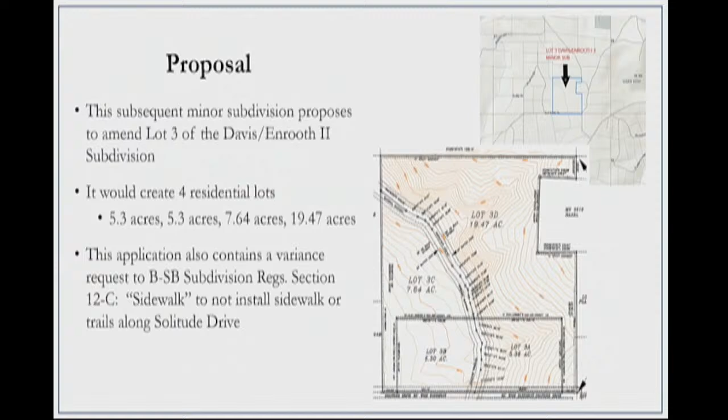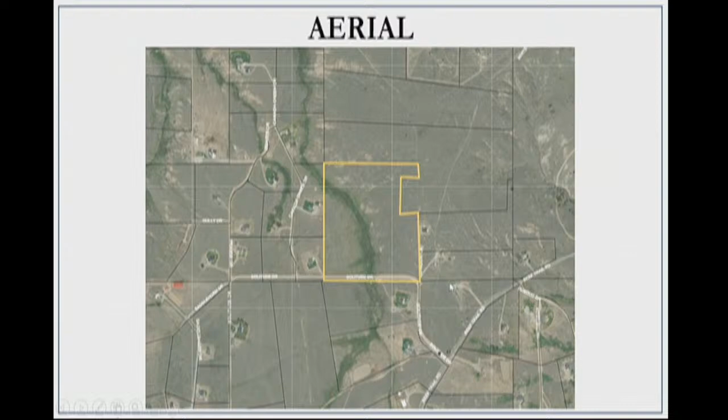Here's an aerial of the location. You can see Beef Trail Road here. This is Solitude Drive, and it's right on that 90-degree corner on Solitude Drive. The zoning is R1S single-family suburban zone.

Those services are not available. Stormwater, sanitary sewer, and wells need to be approved and permitted prior to filing the plat, and the applicant is working on that as we speak.

All access to these lots is along Solitude Drive, which connects to Beef Trail Road. Each of these roads would see increased traffic proportionally for 4 new families. There could be 4 single-family homes on this subdivision. One thing to note is the fire suppression requirements.

It's Appendix A in the subdivision regulations. It gives the applicants a choice to meet those requirements: either installing an underground tank or requiring fire suppression systems in the houses. They've chosen in-house fire sprinkler systems. So when, to the extent that this is approved at the building permit portion, it needs to be shown that those wells can sustain the fire sprinklers.

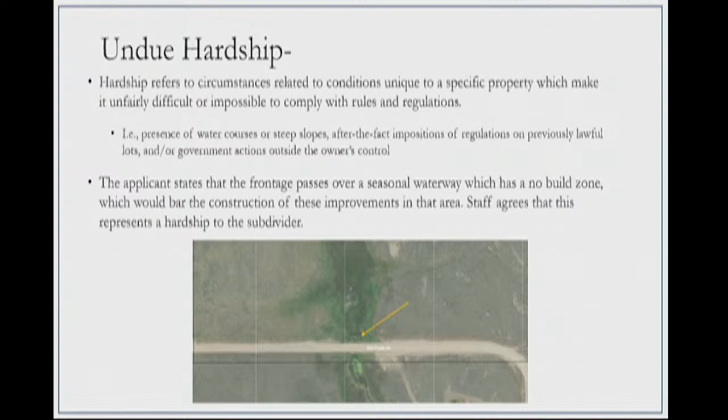Such as water courses, steep slopes after the fact, impositions of regulations on previously lawful lots, or government actions outside the owner's control. The applicant states that the frontage passes over a seasonal waterway, which has a no-build zone that would bar construction of these improvements. Staff would agree for a large section of this, and that can be constituted as a hardship.

As far as being contrary to the public interest, Section 12C ensures that new development and community contributes to reasonable and necessary improvements to the immediate surrounding area, which shall exist and provide multimodal transportation for nearby residents. The applicant has stated that the proposed variance would not affect public interest as the road is currently being used without any sidewalks, trails, curb, and gutter.

They also state that adding these features along the 1,300 feet of road would not enhance the use of the roadway to the public. Staff agrees there's little potential for this improvement to ever connect other sidewalks. There are no trails constructed on the nearby roads. The lots to the west are developed to full capacity, and no future subdivision would require anything to be built.

There's one property to the east which could be subdivided further, which there could be some, but really the requirement of sidewalks, curb, and gutters are more in an urban setting, and this is suburban by zoning default, and the larger lots aren't conducive to that type of infrastructure.

The roads out here have roadside ditches, and there's no storm infrastructure, so curb is really not the proper infrastructure for these areas. But future subdivisions should probably consider trails or some kind of other multimodal access to keep people off the roads.

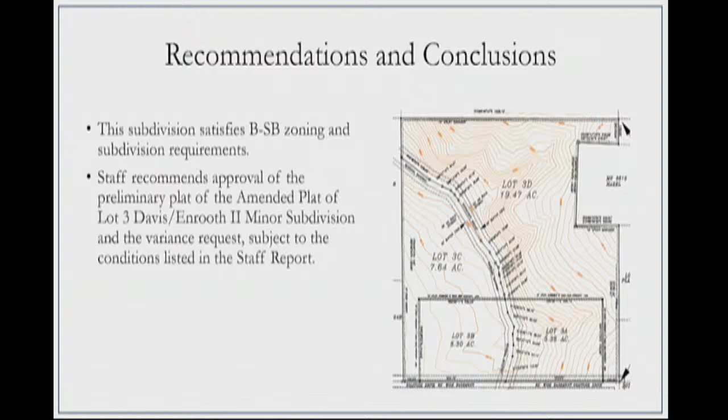And number 9, prior to filing the final plat, applicants shall pay all fees associated with the administration of preliminary plat review. So those were the suggested conditions. Again, we are recommending that the subdivision be approved with the variance. I would be available to answer any questions from the board that you may have.

Thank you, Dylan. I appreciate that. Does any of the board members have any questions for the staff? Seeing none.

I have a question on the, I don't know, the swamp or the flood plain that's there. This past year was substantial as I drive on that road, and where it impacted the road. How is the entryways into these properties? Is that addressed in this application?

Mr. Chairman, Mr. Daly, so you can see the lots up here on the screen. This is lot 1 and lot 2, and this is the drainage here. Lot 1 and 2 -- one has 525 feet of frontage on Solitude Drive, and one has 593. Lots 3 and 4 have 100 feet of access to Solitude Drive on either end of the property, as existing, and they're plenty far enough, far from the drainage way.

And just to clarify, it's not a regulated floodplain, but it is a seasonal channel that conveys stormwater and snowmelt runoff. That's the reason for the easement requirement, the no-build zone, and the buffer requirement. And what they've proposed on the plat meets those regulations with the no-build zone.

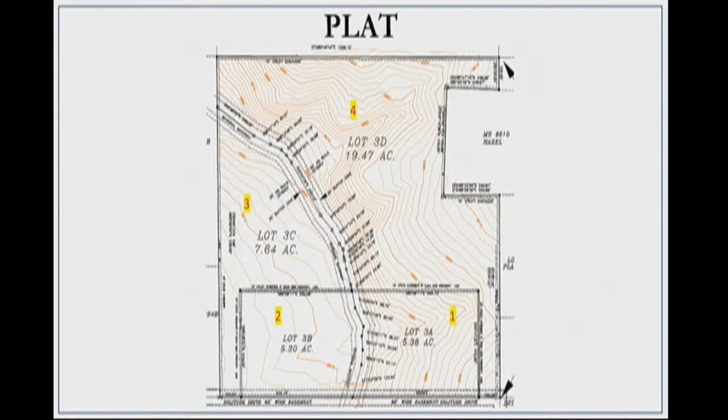I believe the applicant -- and he could probably speak to it more -- has already picked some build sites on these locations. So they probably have their driveways kind of figured out already, because they're starting to test for the septic permits. They have to take some samples for those. So I believe they've already picked out some build sites, but I believe lot 2 is going to have some issues.

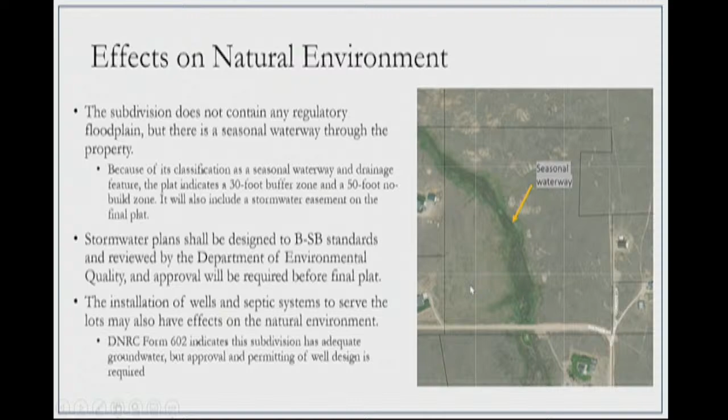Yeah, you can see the green there on the aerial where it's at, and lot 2 comes out to approximately in here somewhere. This season -- and maybe it's not going to be every season, but this season -- that water extended to the west. I don't have a distance in my head, but it was substantial.

So it collected right there. I don't know if we need to think about addressing that now on plat approval. Mr. Chairman, Mr. Daly, so the subdivision regulations have that requirement of that offset from that waterway. I don't know -- are you thinking about like going a no-build zone beyond that?

No, I think the hard thing is defining what is the waterway. Is it the center of the creek? Is it the edge? Defining that, I think, is the challenge. So here, the way the regs read is it's from the center line of the channel, that 30-foot vegetative buffer and the 50-foot no-build zone. And the reason for that is looking at the effects on downstream landowners.

So they don't want you to go into that no-build zone or that vegetative buffer because there's a chance that increased sediment may go down in seasonal runoff. The subdivision regulations, other than that -- if a landowner chooses to build where seasonal runoff may flood their house, that would be their responsibility as long as it's not affecting the downstream landowners. So that's the reason the subdivision regs look at it that way.

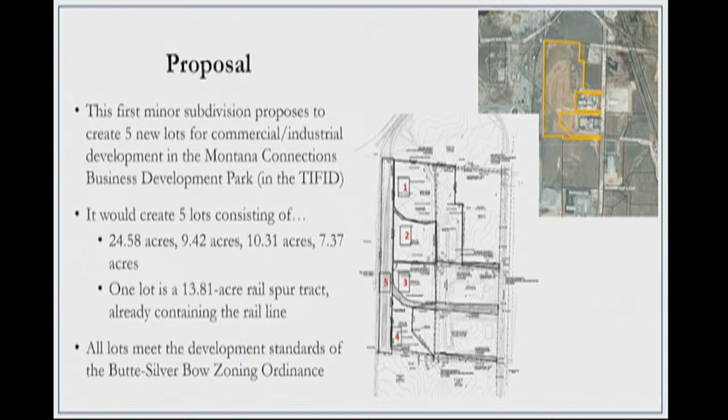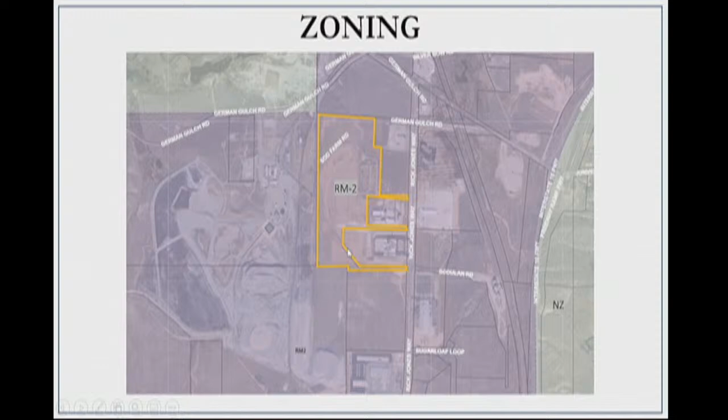Here's an aerial of the location of the subdivision. The zoning is RM-2. Here's a visual of the plat. You can see the first one up here, 2, 3, and 4, and here's the railroad.

The effects on local services: this subdivision would create 5 new lots for commercial industrial development. All lots shall be serviced by municipal water, sewer, stormwater, and roads. The subdivision has an approved MFE provided for adequate capacity of municipal services.

3 new roads will be constructed with the subdivision: Locomotive Way, Sod Farm Road which is already existing, and a third to be determined. All 3 roads are cul-de-sac roads with adequate length and turnaround dimensions. All new roads shall be constructed to meet or exceed Butte-Silver Bow standards, with road plans approved by Public Works and the Fire Department. The BSB Fire Department has approved the location of 5 new fire hydrants for the subdivision.

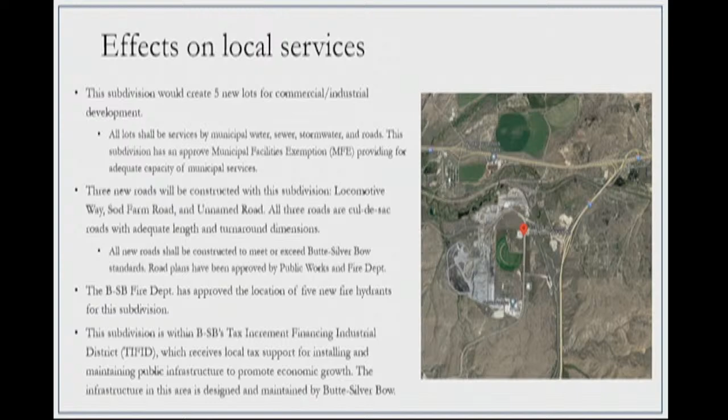Butte Area Fish, Wildlife, and Parks commented that because of the development already occurred in this area, they don't see any major concerns for wildlife. There are pronghorn that migrate through the general area during spring and fall, so if fencing can be avoided to the extent possible, that would be beneficial to them. The subdivider and developers should take this comment into consideration and attempt to accommodate the migration patterns to the greatest extent possible.

Effects on public health and safety: each lot is planned to be serviced by municipal water, sanitary sewer, and stormwater infrastructure. This subdivision has a municipal facilities exemption, indicating adequate capacity of municipal infrastructure to serve the 5 new lots.

Access will be to Rick Jones Way and/or one of the 3 new roads. All new roads will be designed and constructed to Butte-Silver Bow standards and eventually owned by Butte-Silver Bow. The proposed subdivision is within the Butte-Silver Bow Police and Fire District and would be served by such resources in case of an emergency. The installation of 5 new fire hydrants will ensure adequate capacity and reach for fire suppression. This subdivision also meets the standard requirements for easements and legal and physical access.

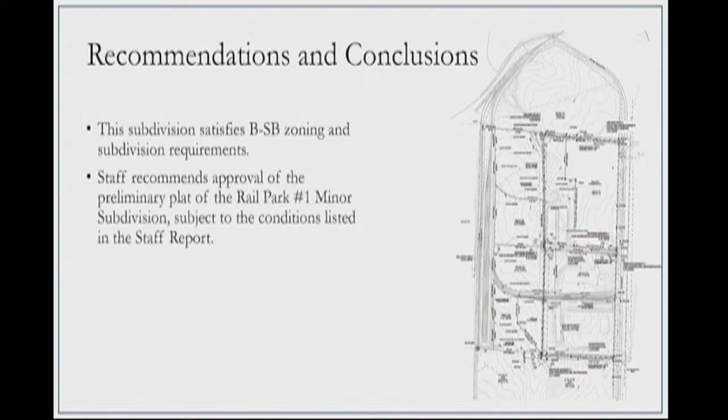Thank you, Mr. Chairman.

Thank you for the presentation, I appreciate that. Do we have any questions from the board members? No questions? We should ask a hard question. I have none as well at this time.

Would the applicant like to... Troy, I know you'd be dying to tell us something about this if you do. Okay.

So at this time, we're just approving this to move it forward, correct, Dylan? Mr. Chairman, that's correct. This is a minor subdivision, not a subsequent minor subdivision, so it's not a public hearing. We're just looking for a recommendation to the Council of Commissioners. Thank you, so at this time...

We have a motion on the floor. Do we have a second? We have a second. All those in favor state aye. It's approved.